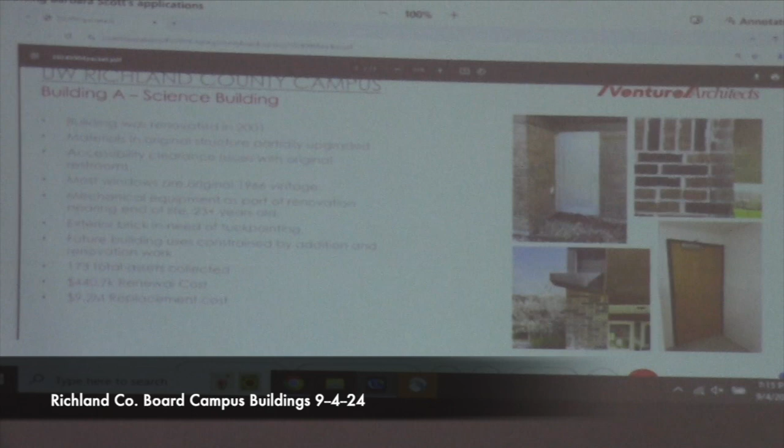So I'm trying to think what else we have here. With that building, we collected 173 data points. The future use for that building is really constrained by the lab portion of it. If there was a need for another lab or classroom type use, that's perfect. Anything else would require a pretty significant renovation of that space, since you're just dealing with the 1966 shell and structure of the building.

Trying to look at the pictures, it's kind of fuzzy, but what we're seeing here is the door on the lower right, indicating the accessibility clearances that are not present in the bathroom, which should actually have 24 inches on the side of the pole.

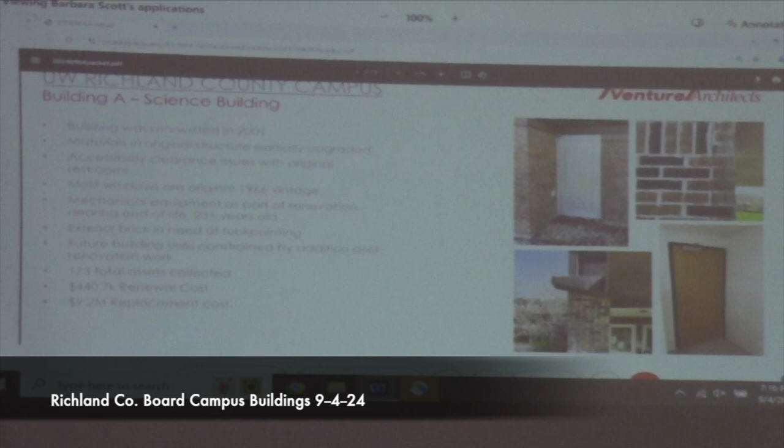So that's not there. There is a crack in the brick in the upper right corner, that's actually the new brick from the 2001 addition. There were some detailing issues, water got in there. In the lower left picture, there's a ring scupper coming off, and that water is actually coming down on the brick, getting into it, and it's cracked, the relatively new brick. Then there's some door issues with the particular door shown in the upper left.

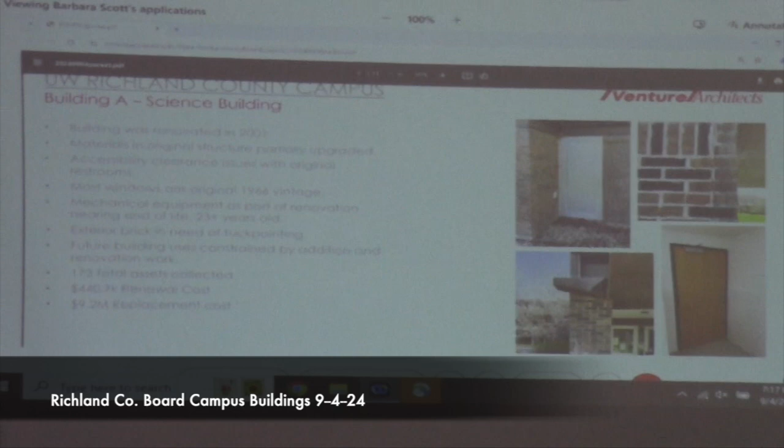That one, the piece with that was there was not a concrete pad on the outside, and that is an exit door out of the lab. So we can go to the next slide.

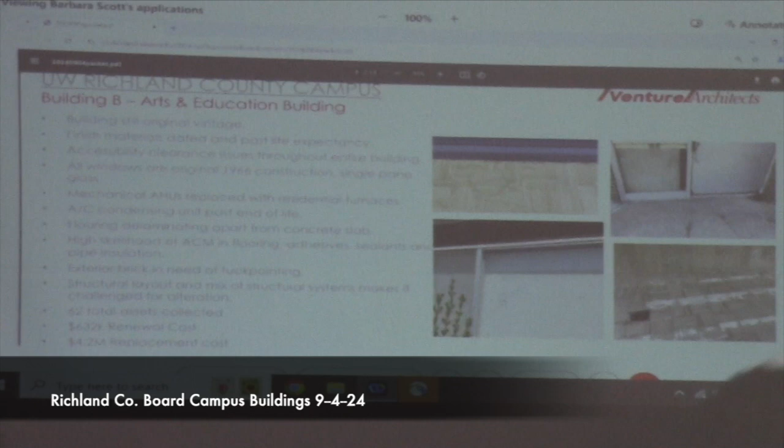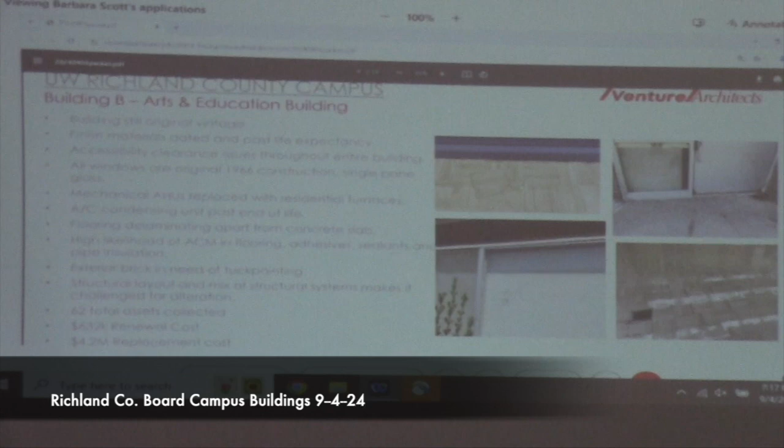So Building B, scoot underneath here, is the Arts and Education Building. This would be, if you're driving up to the campus, the furthest to the northeast. It is the smallest of all the buildings. With that building, we collected a total of 62 data points.

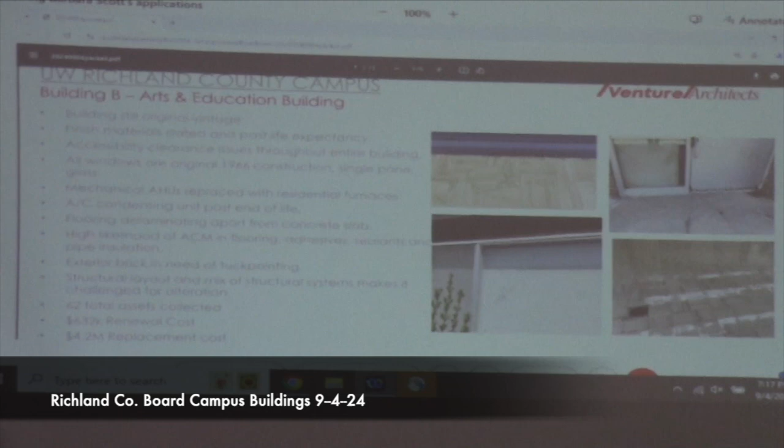This building, all the way through, is original vintage. Nothing has really changed in here. This is probably, of the buildings we went through, the one that really seemed to be in the worst condition for deferred maintenance.

A big part of that, you can see in the picture in the lower right, is that the flooring is starting to come up, there's moisture in there, delaminating all of the floor tile. There's a number of cases where the tiles actually broke apart. Very likely, due to the vintage, although we did not test it, there's a high likelihood this would have asbestos containing material either in the adhesive, the tile, or both. So that's just a piece we've noted as part of this.

Again, the brick conditions need tuck pointing. There were broken windows as part of this. The windows, again here, are single pane.

The air conditioning condensing unit is past the end of its life. I know the one at my house already is. We all have limped those things along like we've attempted, but that one was rated not well compared to all the other ones.

Let's see what else we have in here for this one also, yes. Accessibility clearances. Not only was it the clearance issue we had, it's also the doorknob.

So this building, in the original Building A, when it was upgraded in 2001, all of the doors ended up getting door handles. That's in part just to make it a little bit easier. If any of you have arthritis, I do, turning a knob can be extremely difficult. That's why a handle is always much easier, and that's why it's part of the accessibility code. This building still has knobs on all of the doors.

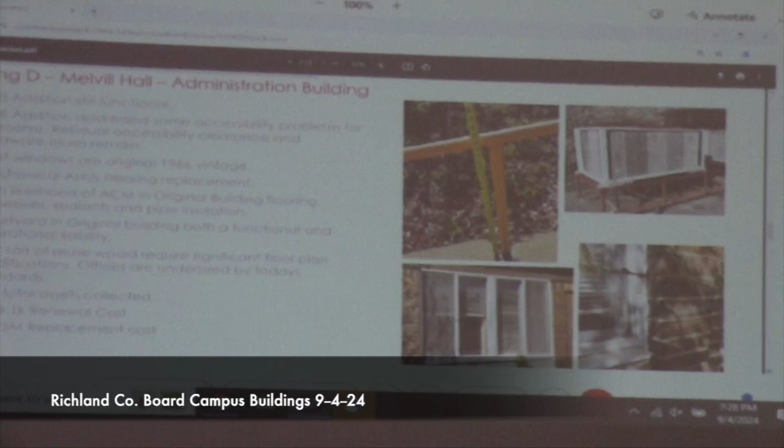The next building on here is considered Building D. This is Melvill Hall, the administration building. This is the building that had the addition put on towards the gymnasium in 1998. The addition, I will say, from a functional standpoint, was really well done.

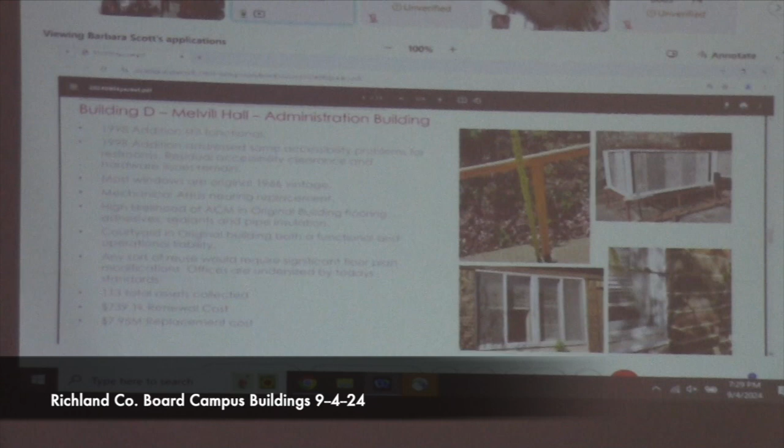Part of the issue we looked at is that the original part of Melvil Hall was specifically designed to be instructor and professor offices. They're really rather small and not up to any standard for what you'd have today. If we were designing a new office building, those would be undersized offices. You could knock a wall in between, but the proportions would still be a slightly odd office.

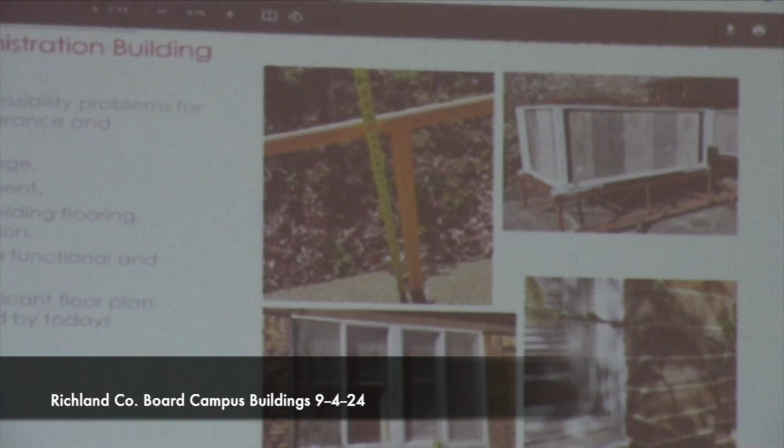So any kind of reuse of the additional spaces, the part closest to the Roadrunner Cafe or the Copper Top, that piece is also a double-loaded corridor. You have a corridor going down the middle, and on either side are these smaller offices. To really make any kind of offices work in the original part of Melvil Hall, it would require almost gutting out that entire donut of walls and reconfiguring it to probably a single corridor with offices on one side. The other odd part was the courtyard in the middle.

At the time, the design was probably fantastic. It's now become a bit of a liability for the building, because there's a lot of weather getting into that space, and there isn't a lot of accessibility for maintenance people to get in and fix things. There was actually one structural column coming down, attempting to bear on a piece of concrete, but the whole base of the column had deteriorated due to rust because water had just come down and taken that away. So any kind of major renovation in that space, that central courtyard, would have to be addressed as part of that design.

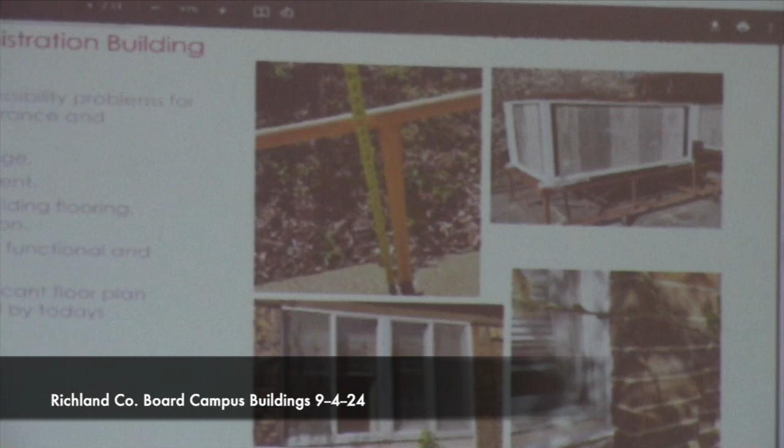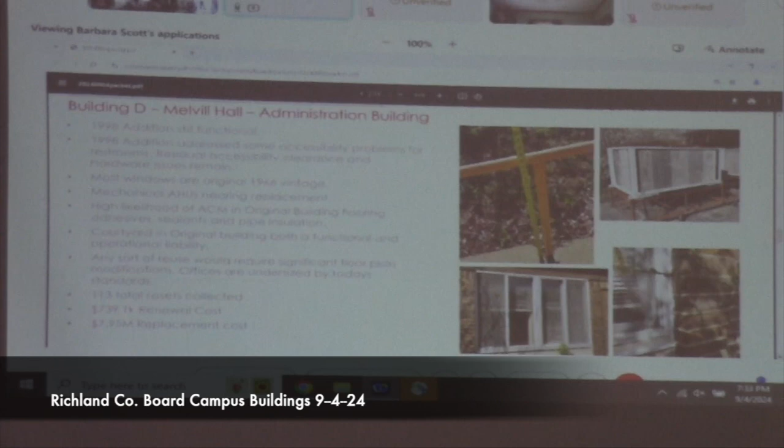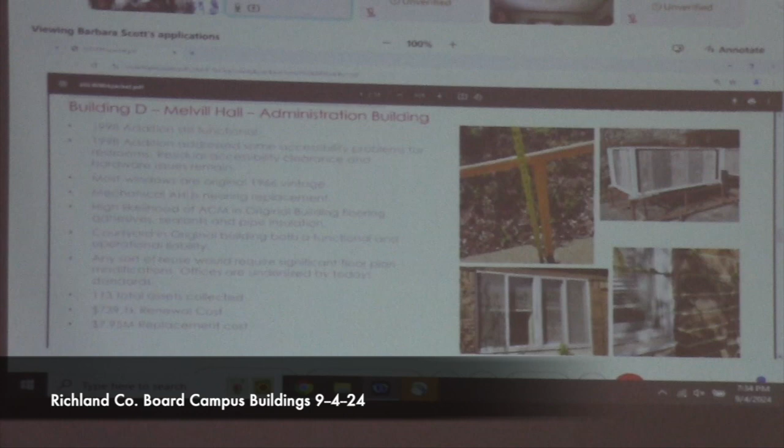I'll just add this caveat to that replacement cost. Those numbers are as shocking to us as they are to you. Since COVID, we have seen nothing but construction costs go up in a vertical fashion that is absolutely alarming. Even putting costs like this up here makes us nervous, because it's like, I put that on there today, and it could be over that by the time we put it into a presentation. It's a very volatile market, so those numbers for an office, while alarming, are what the market rate is going for right now.

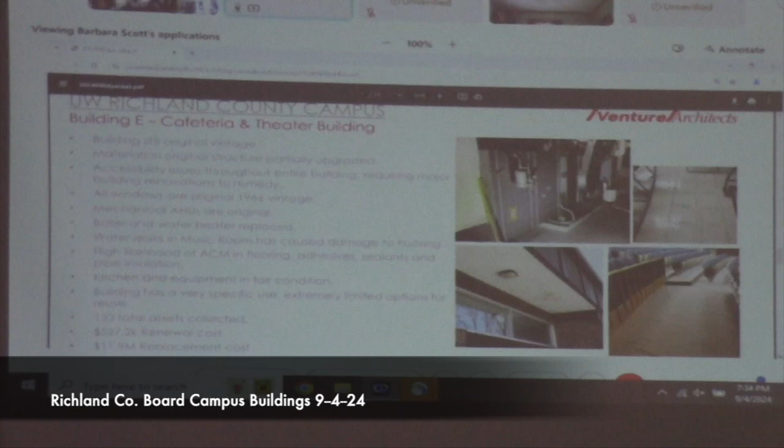We can go to the next building, which would be Building E. Building E is the cafeteria, the student center, and the theater building. This building, we collected 133 total assets. Again, very much the same pieces as with all of the other buildings: single pane glazing, accessibility issues.

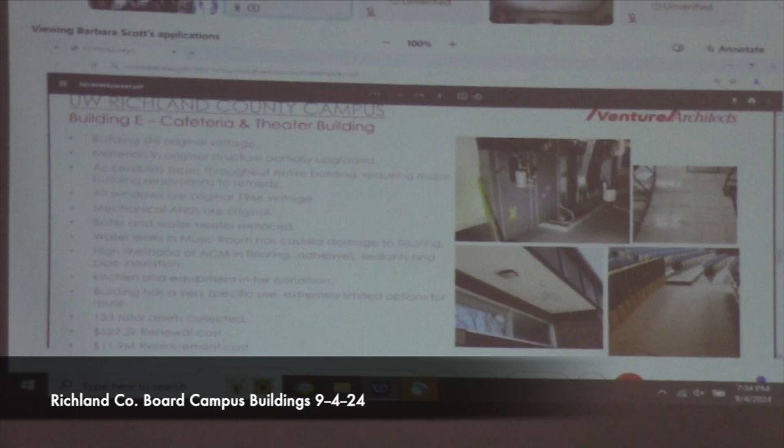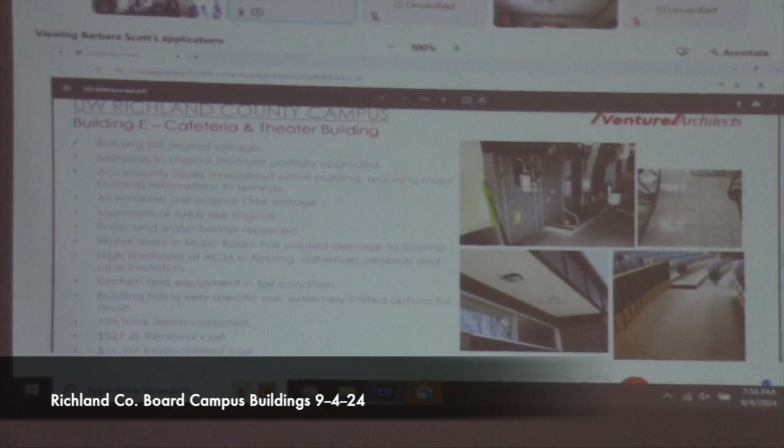This one, they actually addressed the accessibility issue, likely for the theater given its location. There's a vestibule on the south side of the building that's fairly large, and they actually took part of that and created a family restroom that's accessible, right next to the men's room in there.

It was, again, one of these odd things. We have the original drawings, we're looking at it, and we're like, why are there 3 bathrooms here? We only see 2. And it's like, oh wow, somebody put one in the vestibule. That's a unique solution, and it works out well for the purpose needed, but it still does not address the accessibility issues elsewhere.

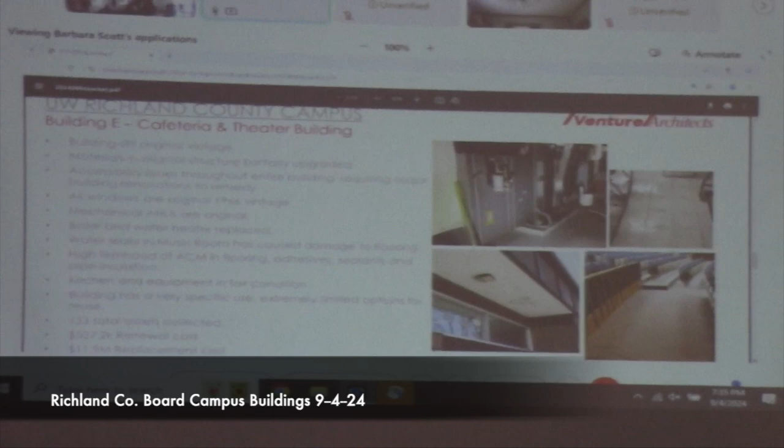There are a number of stairways that are too tight, doors that don't have the clearance that are needed. So to make this functional from where it stands today, there would be a great deal of investment needed just to get everything up to be fully accessible.

There was a water leak above the music room at some point. A lot of the floor tile, much like the floor tile we have in here tonight, is starting to curl. It's delaminating in a way, and that's coming up. I believe the roofing piece was addressed as far as we could see, but that damage has been done. The other items we have here are the air handling units between the music room and the theater area, if anyone's familiar with that.

Those are still a lot of the original large air handling units that are in here. The room was probably maybe half the size of the room we're in today. And these things, they're massive, they're taking up a lot of space.

There are some new boilers up there. That was a positive thing to see. But the air handling units, they've been well maintained, but they are probably like 30 to 40 years past their life expectancy from what we would see with that.

The kitchen was in pretty good condition, pretty fair condition. The equipment looked good, as we understood. There were deliveries still being dropped off last June, even after classes had stopped. There were still some things in the storeroom. Everything we saw looked to be in good condition.

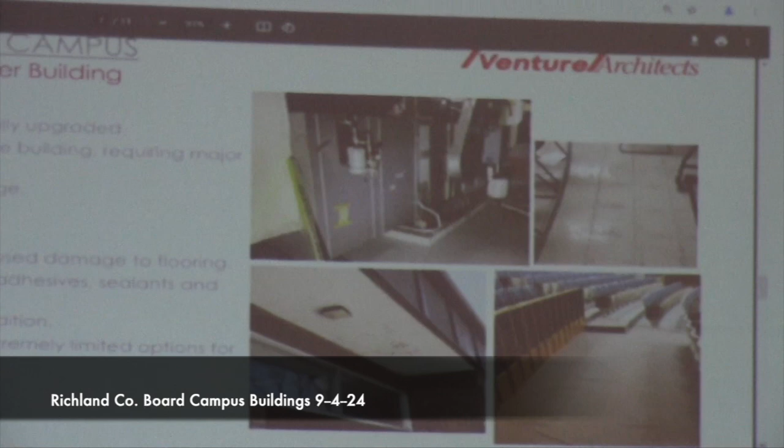A lot of these buildings, as with the windows, a lot of the doors on the outside are hollow metal frames, hollow metal doors. Just due to the amount of salt that has to go down, especially for a university environment, to keep everybody safe, that does a whole number on the doors and the frames. So we're seeing a lot of deterioration at the base of the doors, at the base of the frames. This building also had that.

A lot of the soffits, a lot of that material is starting to come apart. That's the picture down here in the lower left. For this, what we were seeing on a renewal cost was about $527,000. And a replacement cost for a theater and a student union would be roughly $11.9 million.

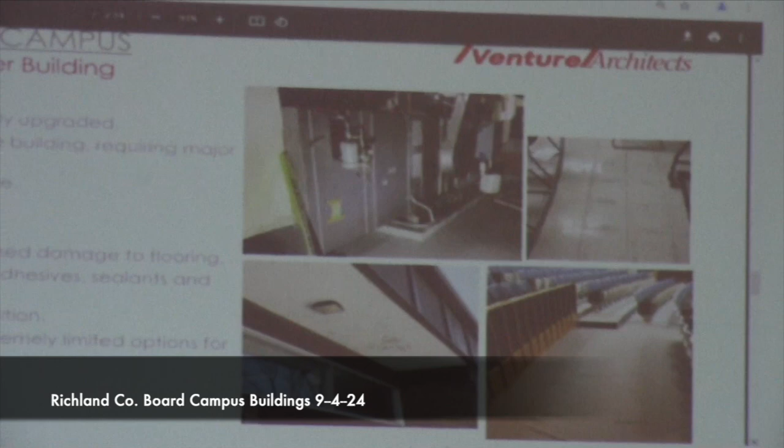We can go to the next slide.

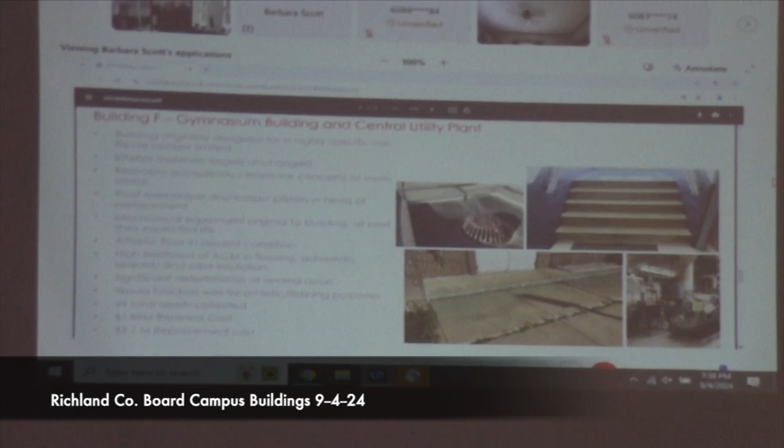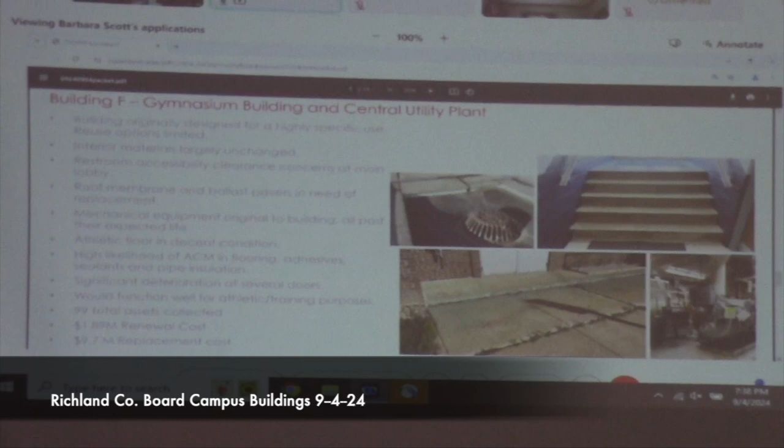So the last building out on the campus is the gymnasium building. And we have on here also the central utility plant. Now that's not the central utility plant for the entire campus, but a good amount of mechanical equipment is housed on the south side of the gymnasium. A lot of that equipment in there is original vintage stuff from when that was built in 1966.

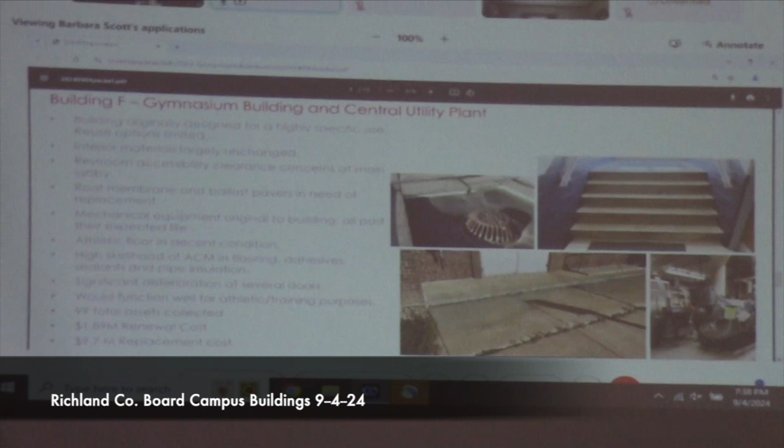Still working. It's still working. I think that's what I can say with that.

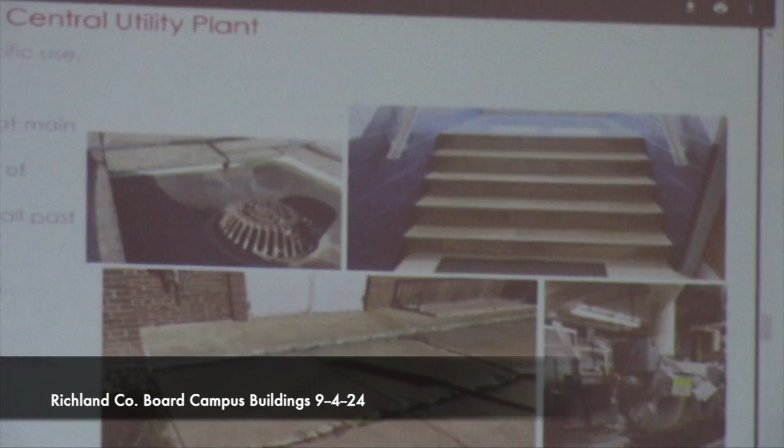The gymnasium building has a lot of the same issues. Again, it's kind of a common theme throughout here, just because it's the same age, it's being maintained the same way. I would say the piece that's different with this, it has this massive athletic floor, and the floor is in just extremely good condition. That's a very difficult thing to keep maintained that way.

And we actually took a break while doing the assessment and did shoot some hoops, just because we had to test the bounce on the floor. And so that was good.

I mean, literally, we're going through, I think the athletic director's office, there are jerseys just still there. And it was rather interesting because we're like, yeah, we could just put those on and shoot hoops as well. But we didn't do that. That would have been a little odd.

So anyways, we checked out all of the lockers and that. Those are all in really good condition.

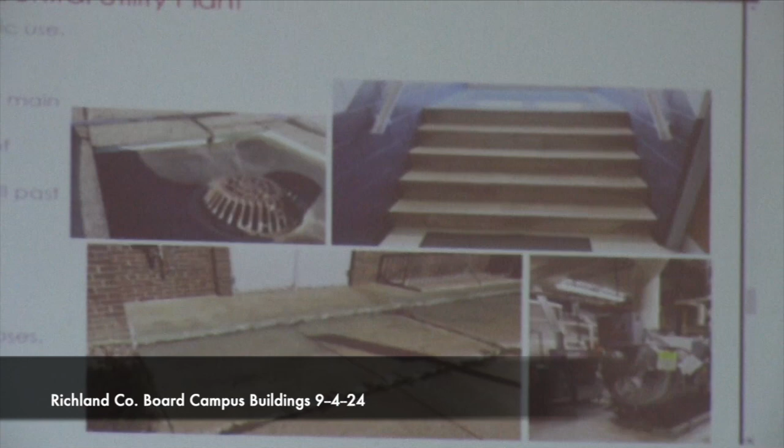Where there was some issue were the doors between, it'll be the north side of the building, there's like a pair of doors there between the gym and the Simon Center, if any of you are familiar with that. And again, those doors are in really, really bad condition.

Our understanding in looking at how the flooring was inside those doors and the steps on the way down is that there must have been some kind of, well, there are a couple of things. Again, heavy salt use, which is something that has to happen for safety, we recognize that. But then that's melting a lot of water. We get a warm day in winter or in spring, that water then comes in up to the door.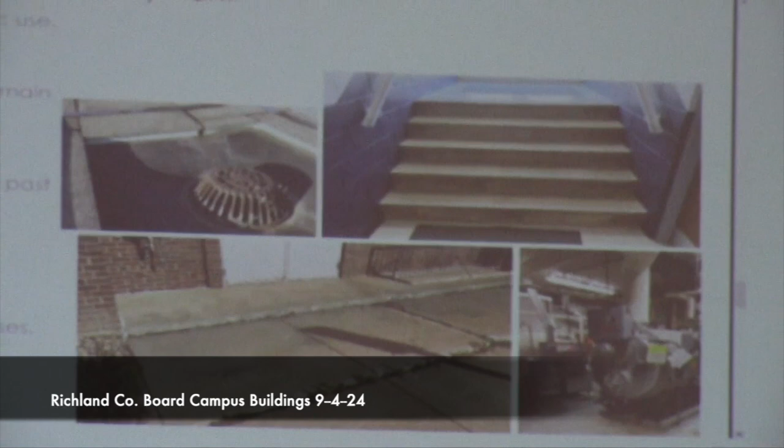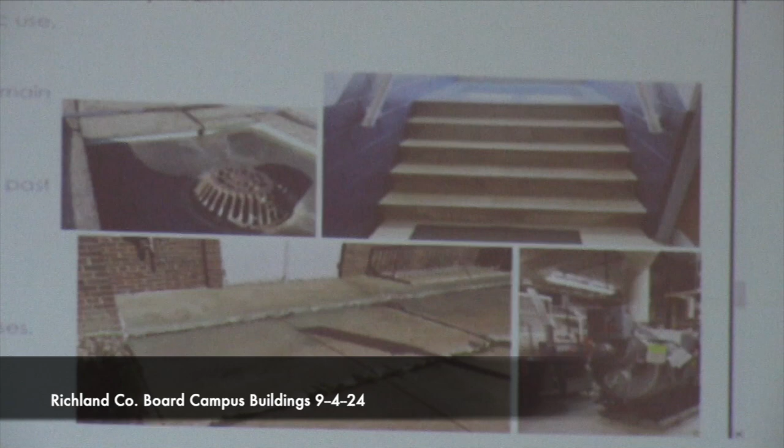The weather stripping hasn't been addressed. Water's coming in under the door, going onto the floor, down the steps. Did not get to the athletic floor, thankfully, but was addressed in a timely way. That was not a single incident that happened. That had been happening a number of times, and I think as that weather stripping on the door goes away, the threshold goes away, it just becomes exposed to any kind of water that comes through there.

And the concrete, as you can see here in this picture in the lower left corner, that's a picture of the concrete that has started to settle around. That picture is actually on the west side of the building.

It's actually a little bit more drastic on the north side of the building, where some of that water, or the slope, is actually going towards the building. So it's just inviting that water to come in.

And the picture on the upper right, those are the steps. What isn't being shown in detail here is all of the nosing on the stairs, all of the vinyl on the front of the stairs, is all coming apart because of that water coming through. Picture in the lower right, that's the original equipment.

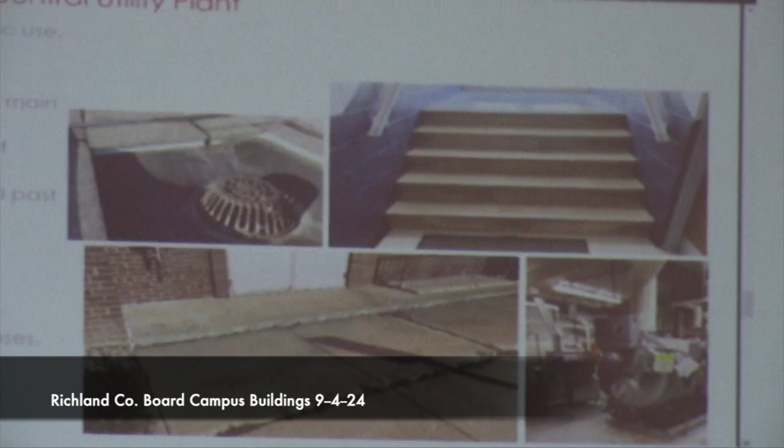And the picture in the upper left, that is the roofing that's up there. So, very unique situation, something I actually have not seen prior to going up there with Randy. It is a ballasted roof, and instead of being ballasted with stone, it's ballasted with insulation that has a granular cementitious cover on it. So it's really rather innovative in how that insulation-cement sandwich gives a protective layer to that membrane. We weren't able to determine if the membrane is original to the building, but the membrane that was there was in really good condition.

And all of those panels that are up there, you can see some gaps due to UV degradation. The foam has started to peel away, but it did its job. It was really, really good. It's a sacrificial layer, and it was a really well-designed system for that. All of the flat roofs on that building are that way. So it has a good hat on that building.

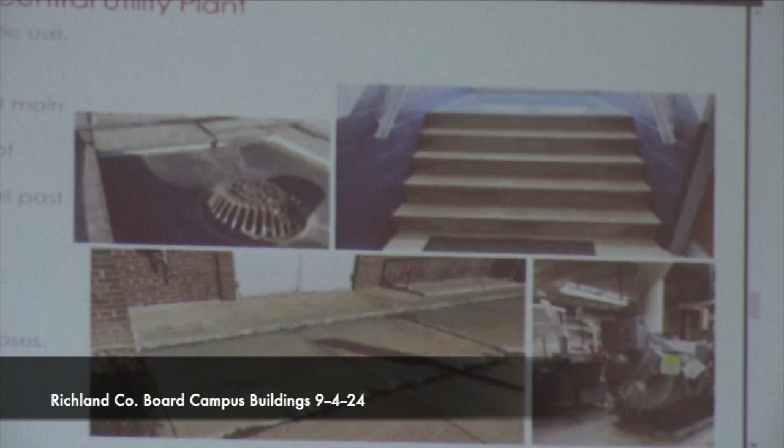The other part of that building, there's the lobby area, the bathrooms in there — those have accessibility issues. Those would have to be brought up to code with that. And the stairs coming in, the railings in there as well, not up to code for accessibility.

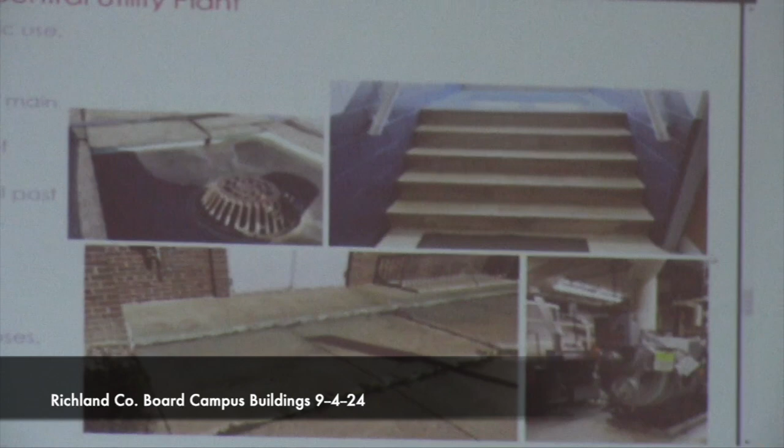There's a weight room to the south of the west entrance. The carpeting in there is all coming up — it's past the end of life. And then on the south side of the building is all the workshop where the mechanical equipment is. We collected 99 total assets on that project.

Renewal cost, as it is right now, would be $1.89 million, not including the renovation for the accessibility components. To build a brand new gymnasium at that size, it would be right around $9.7 million.

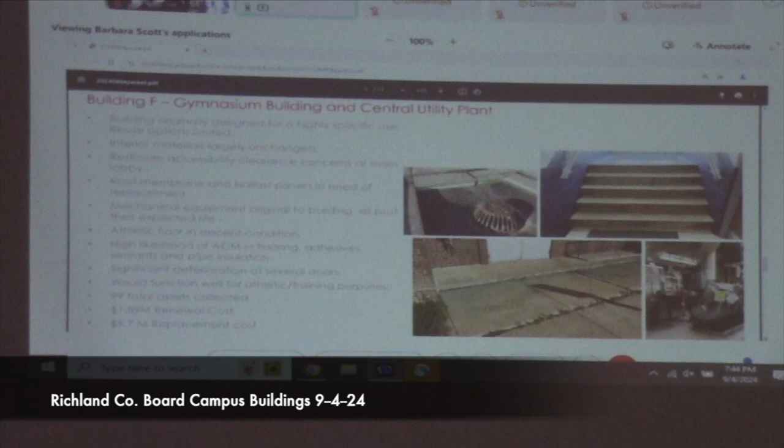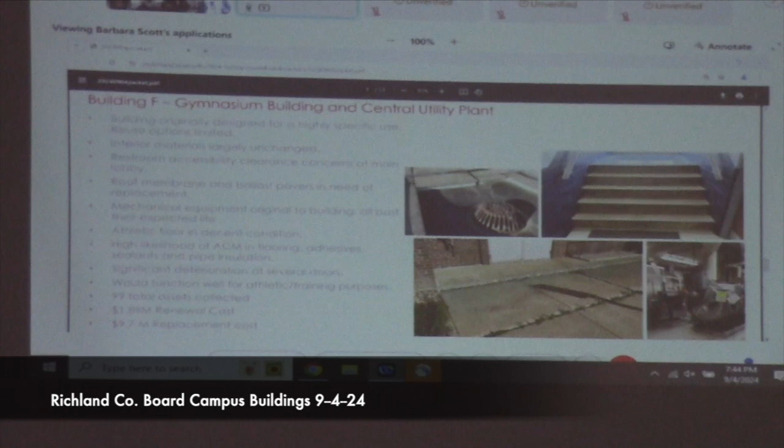The one thing we noted here is from a use standpoint, it really does function really well to keep that as a gym. It's hard to build a big open space that doesn't have many columns in there. So if there is — and because of the floor being as good as it is — a reuse of that purpose would be beneficial.

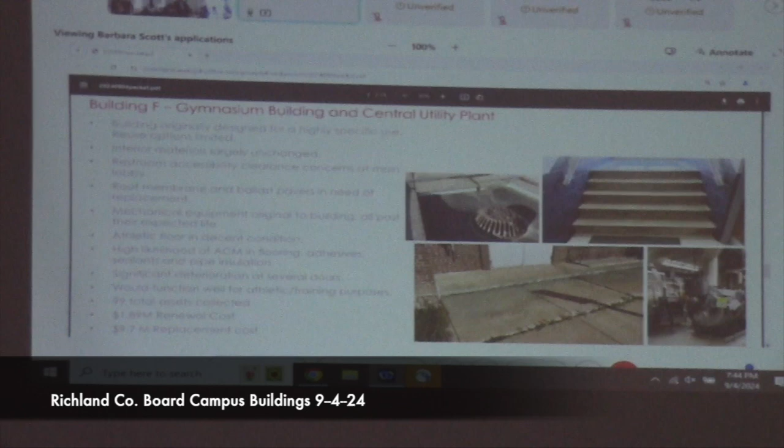And when you start looking at a renewal cost like that, yes, that's a lot of money, but when you think of the actual building cost being $9.7 million, that's an effective number to bring that gym up to a level, if it were needed for any other purpose, some kind of gymnasium, physical training, whatever that would be.

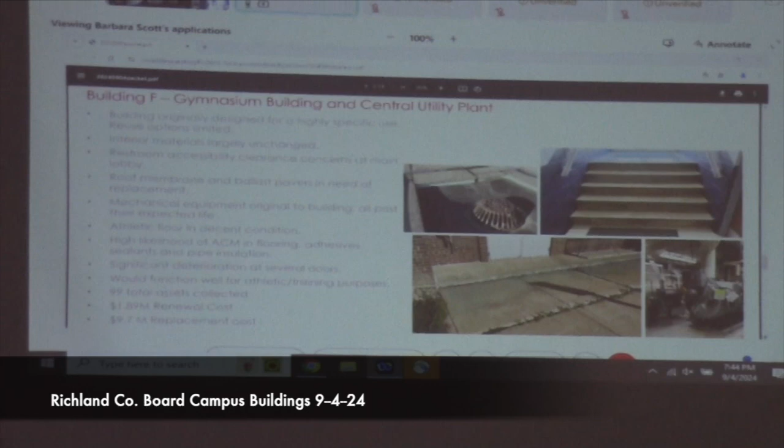So the next building, we have three left here. Now we're downtown. We're at the Health and Human Services building on Seminary. And this, as I'm sure many of you are aware, originally was a supermarket, and there was an addition, and it is the Human Services building now.

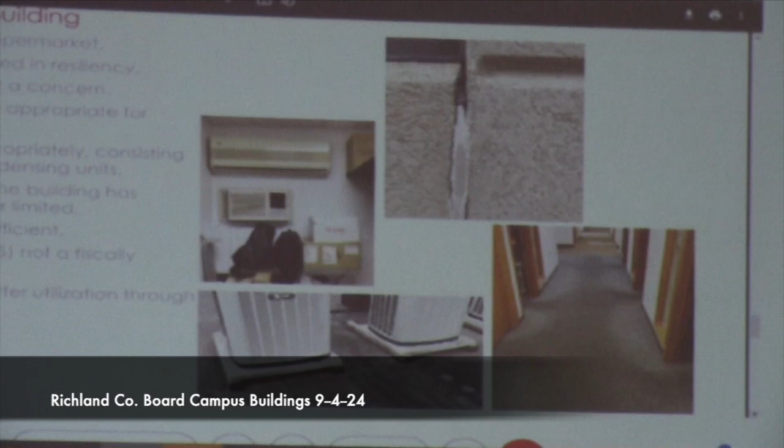Really, for the most part, accessibility is not an issue here. As those additions happened, that really seemed to get picked up all the way along. One of the really great parts of this building, as we reflected after our analysis, is for the services it's providing to the community and to the county. It's really in a great location, centrally located.

It's really accessible from the standpoint that the parking is at the same grade as the door level, and anybody needing to get in there, even with any kind of device — a cane, crutches, whatever it is — it's a straight shot in. That's actually hard to get in a lot of places, so take that as being much more of a benefit for that building than it seems. That was really great to see.

We went on the roof. Yes, the roof, which then leads to the condensing units, which leads to the oddity of this building. This building has one really weird oddity, and that is there is no air handling unit for this building. A building of this size, you would expect a more industrial-size air handling unit.

This building is heated and cooled with 14 residential furnaces, not big ones, just the kind we all buy for our houses - like a Lennox Labor Day sale residential size unit. So there's a lot of ductwork, a lot of equipment, a lot of maintenance for each of these individual units. And on top of that, up on the roof you have 14 different air conditioning condensing units. That's one of the pictures here in the lower left - you can kind of see three of the 14 units up there.

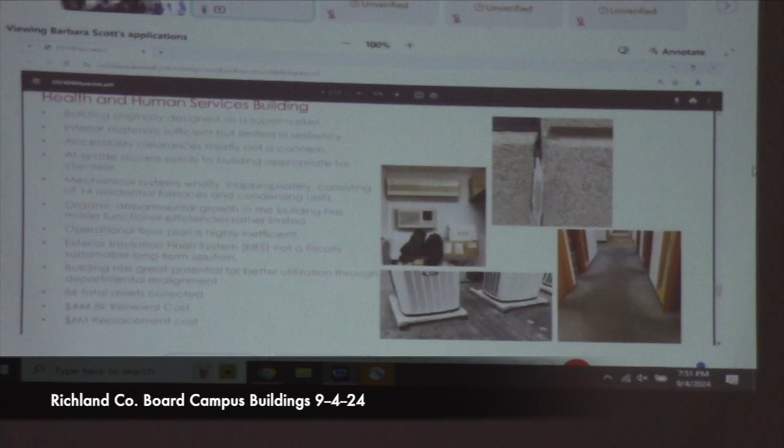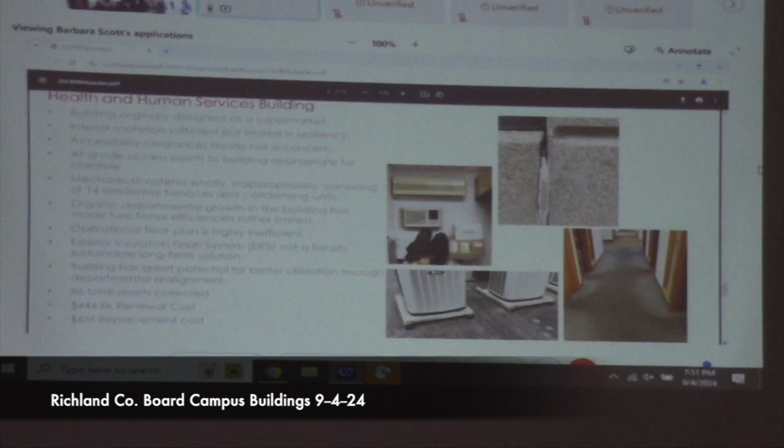So one of the things we recognized as we started going through and looking at all the spaces, that building in particular had the growth of departments happen very organically. As a result, you get the bulk of a department in this area, and then two people way over in that corner somewhere. It's not terribly efficient, and as we found out more about departmental use, we recognized there's a lot of inefficiencies - spatial, organizational, and functional - with this building.

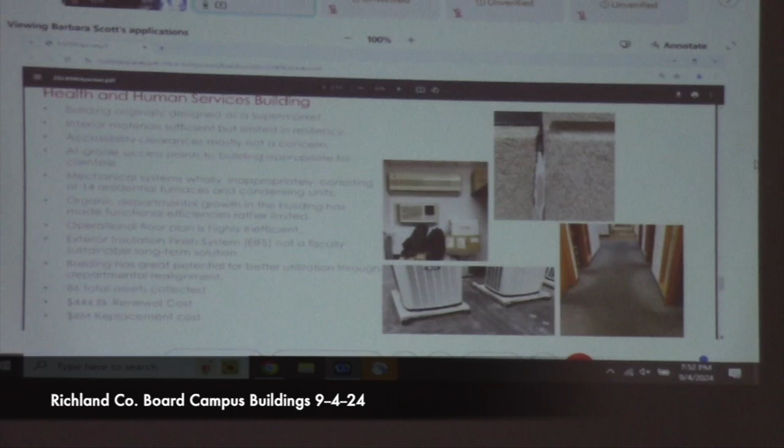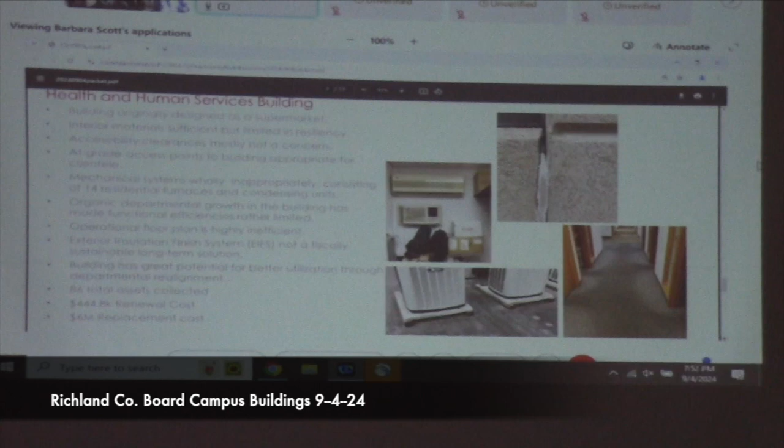But there's a strong likelihood that with just reorganizing spaces and getting departments where they need to be, right-sizing what everybody needs, this building is really super functional for the county. There's a lot of potential - it may not look like it, but that is a really, really functional building. The big part of that, as I mentioned earlier, is the access from the parking lot - everybody can get in there really easily, centrally located. It's fantastic that way.

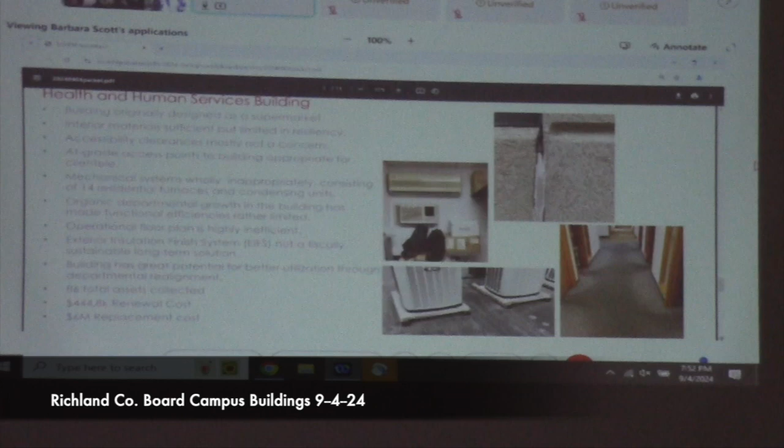With this building, we collected 86 total assets. Renewal cost right now is at $444,800. And to build a like-size office of that square footage would be $6 million.

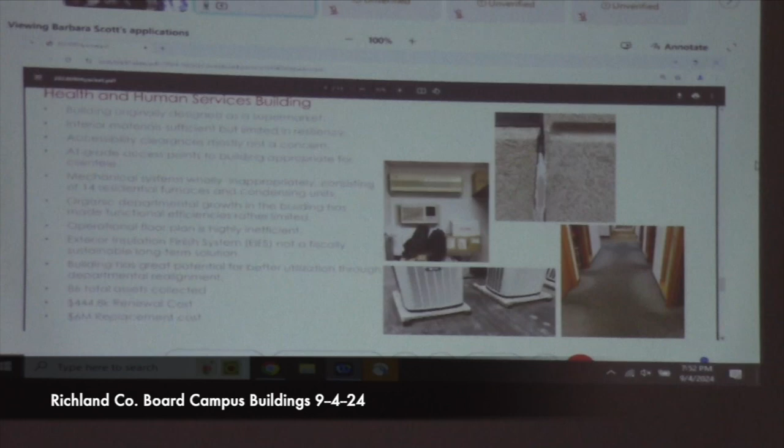We can go to the next building - the courthouse.

Not historic - well, it is historic because it's old, but it's not on the historic register. We found that out and understand that to be not a limiting factor for the building, so that's an important piece. If it were on the historic register, there are a lot of additional pieces that go along with any kind of modifications you'd make. Without that designation, there's some latitude given for any modifications you'd make to the courthouse building.

So the finishes in there - can't do it again like that today. Marble everywhere, and it's beautiful. The door hardware is incredible, the wood doors are incredible, every part of that is incredible.

From a functional standpoint, it's got some issues. It's a big building, an old building, with a massive foundation. In the basement, or ground floor, there are departments in there that make it almost like being in a maze, because one department takes up six different rooms in one corner of the building. So it's very inefficient for an office type of use.

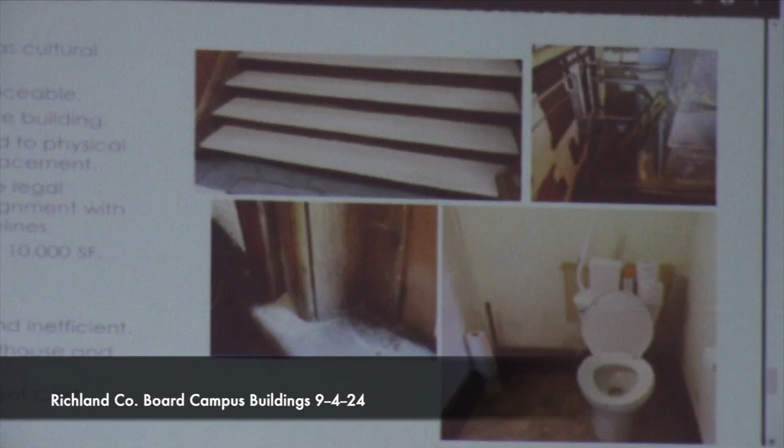And as you go up the floors, there are a lot of load-bearing walls separating the building. So the DA's office is separated between like three different spaces. The clerk of courts has - I think part of her office is actually in a vault. There's just a lot of kind of quirkiness with a building of that age from a functional standpoint.

The picture in the lower right - that is, if I keep going through my memory banks, the only toilet in the courthouse, and it's in the judge's chambers, actually underneath the stair that goes up into the roof area, the roof cavity where there's some mechanical equipment. Very odd - there's a public door that goes in there. Not good at all if the judge is in there and the public are up there as well.

The steps you see in the upper left corner - I believe those were on the east side of the building. They're not up to code in height, and not just accessibility code, just international building code - they're a little too short.

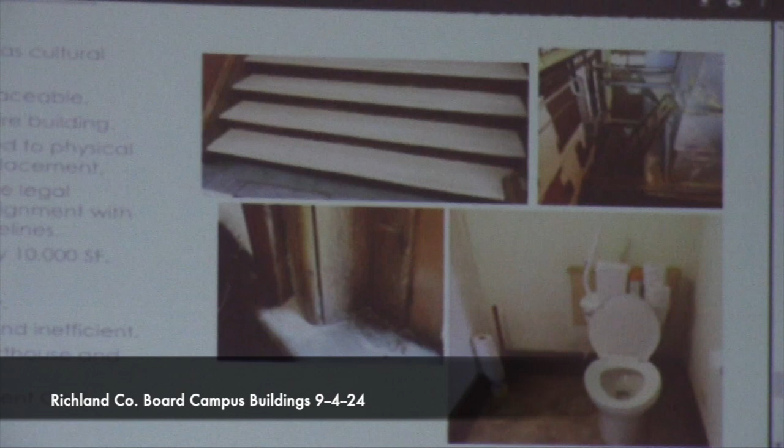The picture in the upper right is the air-cooled chiller for the building. It's up on the roof, and you have to go over the entire building to get down, with a ladder there to access it. It's functioning from a maintenance standpoint - that's a real challenge, and that might be a case where it was a fine solution at the time, but for regular, ongoing maintenance, it will be a challenge.

The other piece in the lower left picture here is some of the windows - they're just showing their age.

We looked at some of the drawings, and there was a window replacement—one of the supervisors may have to correct me—I believe around 1984 the windows may have been replaced, though that might have been later. They are vinyl-clad wood windows, starting to show their age on the inside, and there's been some water damage as well. So there's a likelihood of possibly needing window replacement on that building.

When you drive by, you can look at how many windows are on there. I've counted all of them, there's a lot of windows on there. That will be a significant project, and that cost is actually reflected in this number as part of the entire building.

Roof system, we were still verifying it today. Possibly 40 years old, I think it might be earlier, I'm not sure. We had drawings for when they redid the entire roof structure and the cupola of the bell tower—that was 1984, and that was when the roof was put on. We believe it has been replaced since that time, but we weren't able to find any confirming information. If anybody knows, just yell it out.

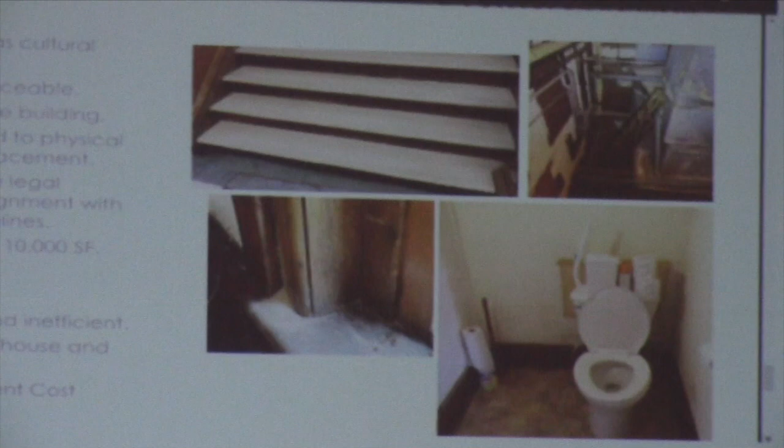Just want to point out one thing as well: if you're familiar with the courthouse, the first thing you walk into, there's no courthouse security. As you walk into the lobby area to get to any departments you need, there's no space for any proper security measures. If you're looking at doing that, obviously that would be an addition—so additional cost to look at, or some major renovation, which would relocate a lot of other departments.

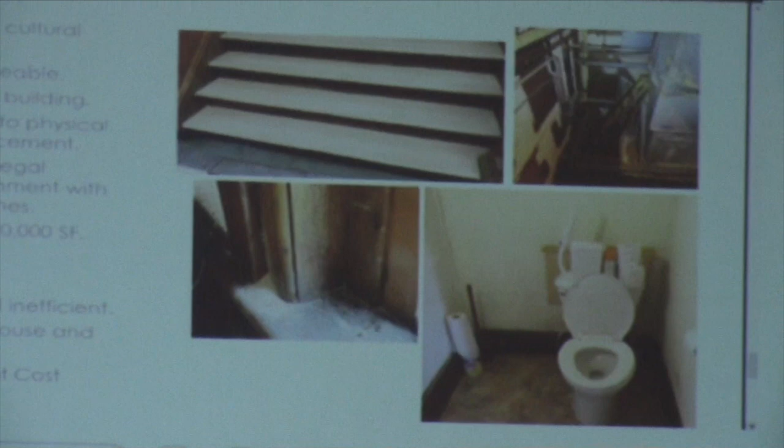And yes, to Corey's point, that entry point for the court is that little building between the sheriff's office and the courthouse. If you've ever been in there, it's low, it's tight, and if you've ever gone through the airport or any courthouses where they have the magnetometer, it's a process where you have to decombobulate, uncombobulate, recombobulate—there's combobulation happening in a hallway with equipment taking up a lot of space. So for the courts to get secure, imagine what all would have to go into that little space at the lower level of basically the administrative building and the court's facility of your county.

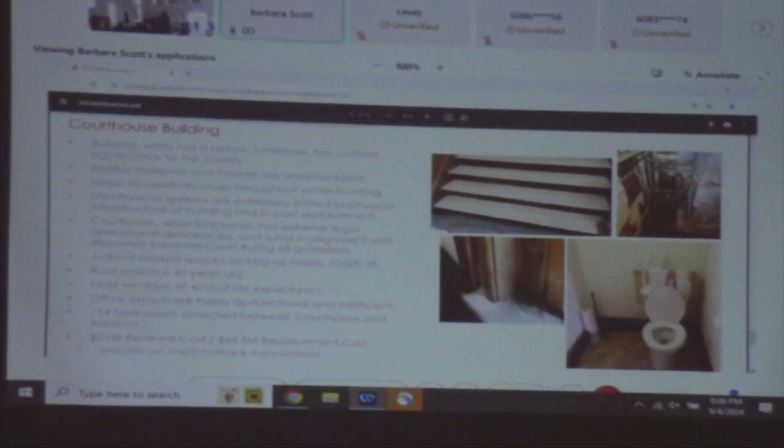So there's got to be an alternative option to that, taking up that space, to Corey's point. The other item with this judicial space is that it's lacking roughly, with the SCR 68 requirements, about 10,000 square feet of required space. That's part of SCR 68.

So the renewal cost and the replacement cost, when you look at that, it's actually tied to the slide after this for the jail. The way we assessed it is because both of those buildings are combined, we reviewed them as one combined building, so that cost is shown for both. So we can go to the next slide with that, please.

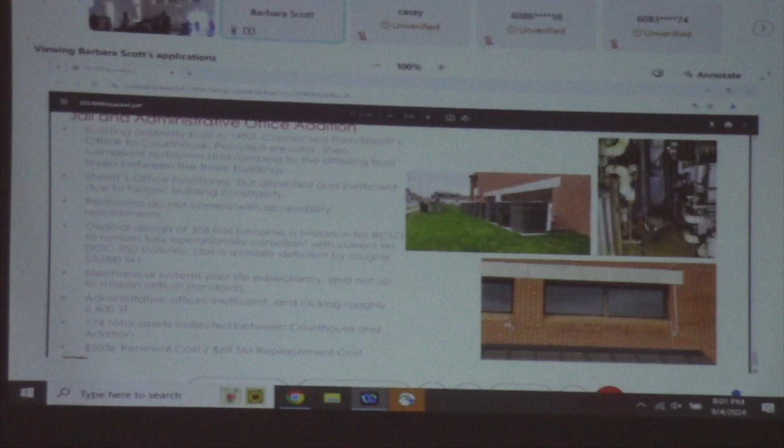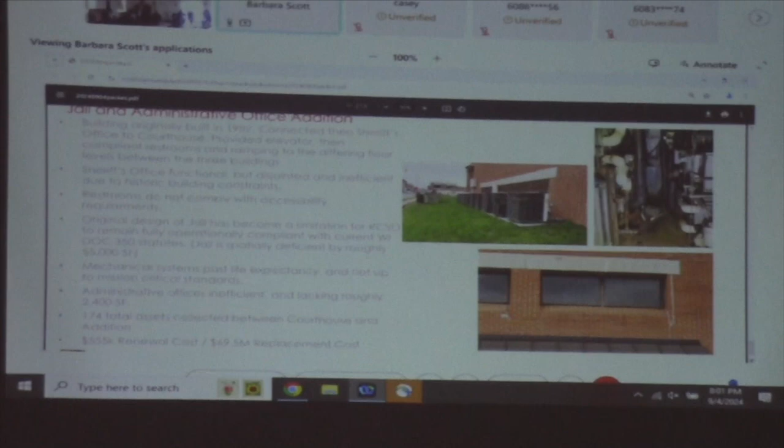So the last piece of this is the most recent addition, and that was the 1982 addition for the jail, the addition onto the sheriff's office. It added administrative spaces on the third floor — I get that wrong every time, Candace. The drawings had it differently, so that's why we have this misunderstanding on my part.

Okay, 82. First thing, a couple of issues. We have the sheriff's office still operating and functioning in the original sheriff's office. In talking with the sheriff, it's working okay. Is it as efficient as a highly efficient office building? No, it isn't, but they're making it work, and they've got the space that they need.

If we move over on the other side, on the lower level, where the emergency vehicles would go, that's now patrol car storage, with the EMS vehicles moving to another location.

Now on the back side of that, on the east side of it, there are 3 different uses to that space. One door is the sally port, where any suspect would be coming in who would be going through booking — they go in one door. The other door is a maintenance door, and the other is just sheriff's storage. It's all kind of connected through there, and it is really a very risky situation.

We tend to have that sally port be a very secure space. How that's laid out currently is not secure. Well, I don't want to say it's not secure — it is secure, but it's lacking a lot of the features that we would have in a jail that we'd be putting together today.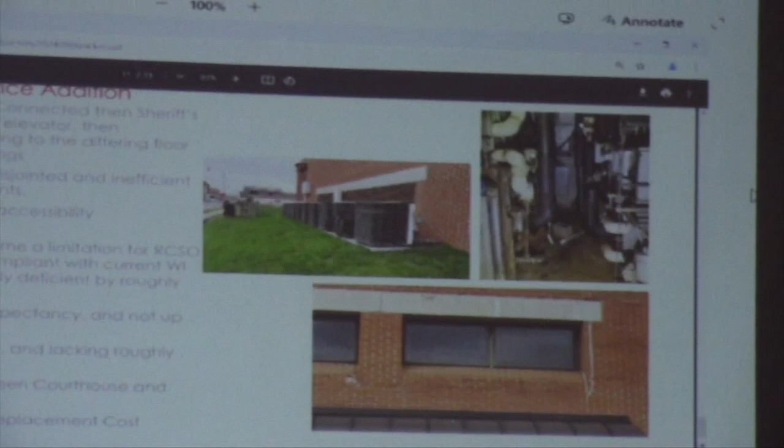So some things with the jail, other than the mechanical, electrical, and plumbing systems — as Kyle mentioned, a lot of the existing jail does not meet current building codes as well as Department of Corrections requirements. Yes, they are grandfathered, but there are certain conditions that actually make it unsafe for anyone who's detained as well as the officer escorting that person.

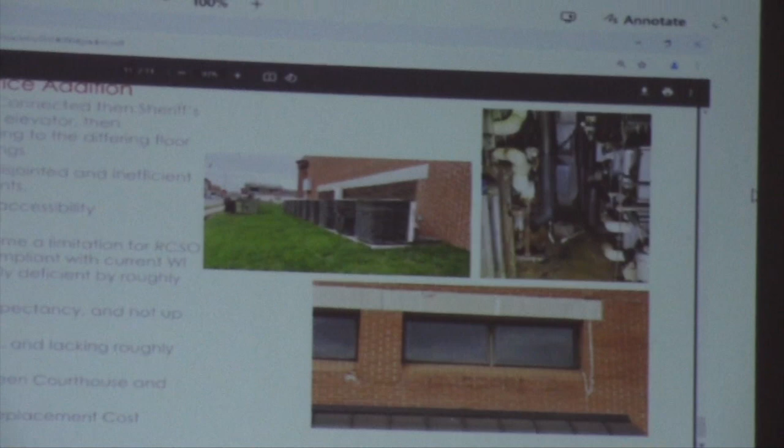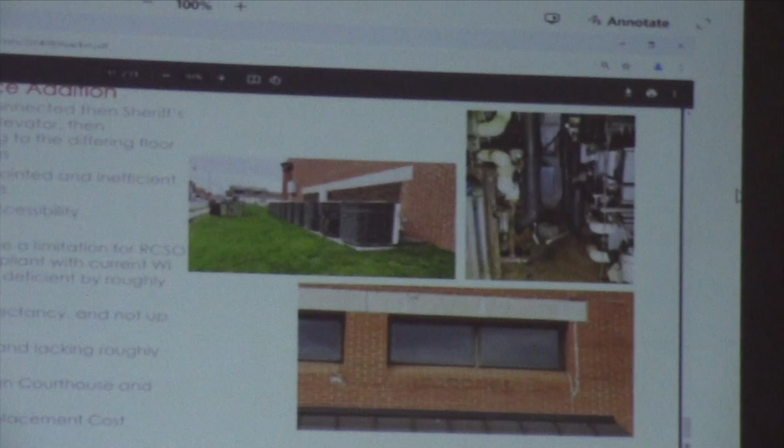Today's Department of Corrections requirements for cell sizes and how they're met under building codes — the cell sizes don't meet current codes, as well as day rooms. The Department of Corrections has certain square footage requirements for each of these areas, and again, they don't meet it.

Also, the corridors in the jail are very tight — some of them are only 4 feet 6 inches wide. So if you can imagine, if two officers have to escort somebody down that corridor to get into a cell, they won't be able to get them through it. If somebody gets combative, it's an unsafe condition for all parties in that area.

To Corey's point, if we look at the picture in the upper left, that's what you can see driving by on the west side of the building — about 7 air conditioning condensing units and a transformer. Typically, because this is a mission critical facility, the sheriff's office and jail, it's got to be up and running 24/7, 365 days a year. Those kinds of pieces are normally in a secure location, where a car can't accidentally run into it, or anybody can just walk up close to it.

Those facilities' mechanical units are usually up on a roof, inaccessible to the public. So a lot of mission-critical items were kind of missed as part of the original design of that building.

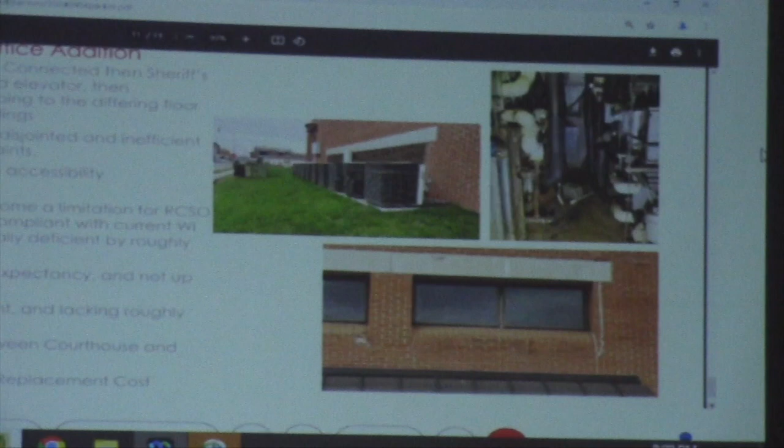The other piece is the bathrooms, which aren't accessible. To make them accessible would require a fairly major renovation, because the fixture count needed for the amount of people in that building has changed since it was designed. So it isn't just adding another fixture in a room—it would literally mean wiping out all those fixtures, and where once a women's room and a men's room were, it may just become one gender's bathroom.

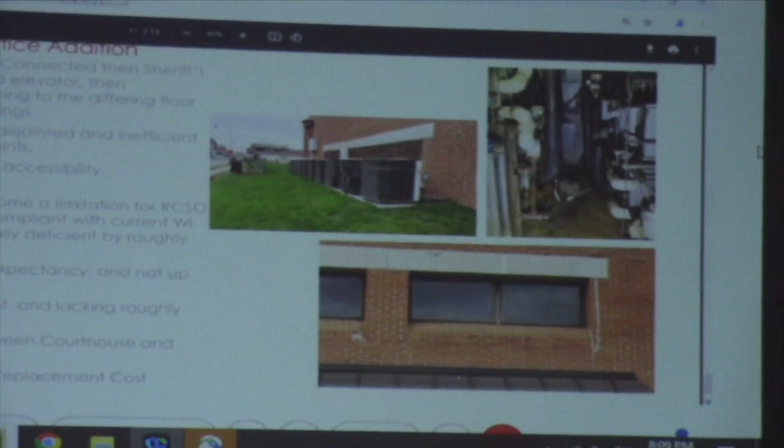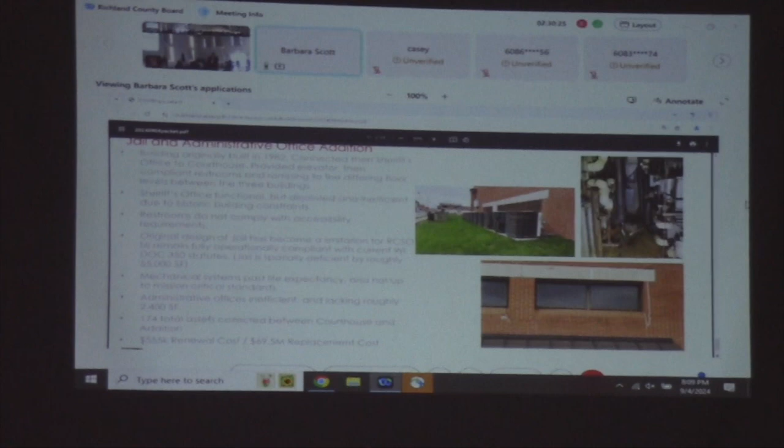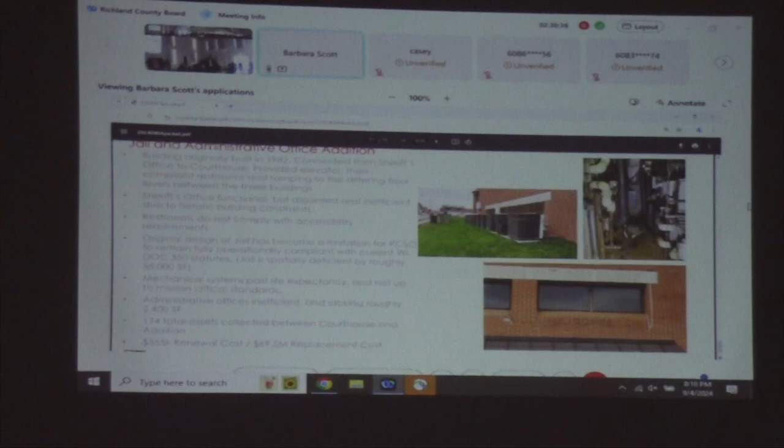So from a renewal cost standpoint, we've estimated that at $55 million. The replacement cost—including sheriff's office, administrative offices, brand new courthouse, courtrooms, and jail—would be $69.5 million. That would essentially be an entirely new justice center, replacing what's there currently and the functions that go with it: jail, sheriff's office, and courts.

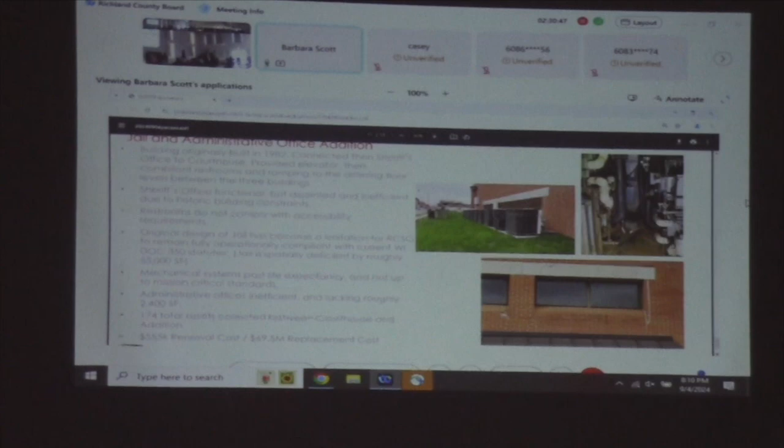I just realized I've been talking for 2 hours. I really appreciate all your patience going through that. One hour? It started at 7. Started at 6, it said. Feels like I've been talking for 2 hours. Oh, it's the clock on there—it's Eastern time.